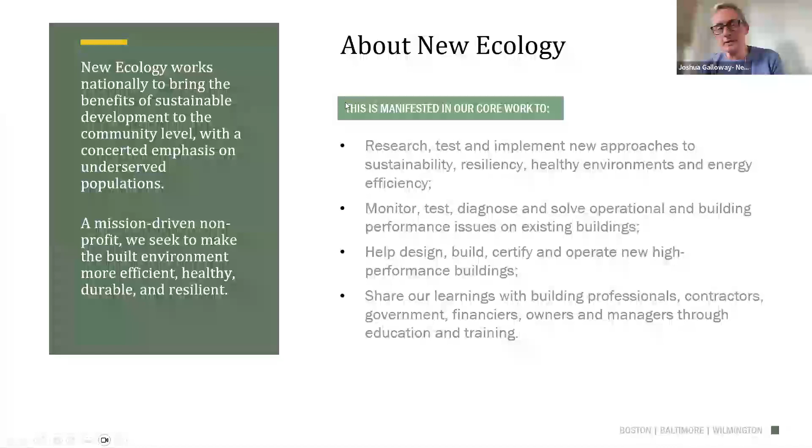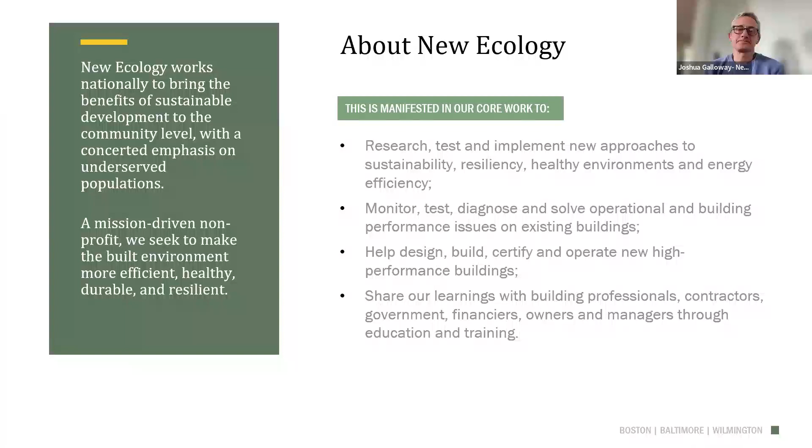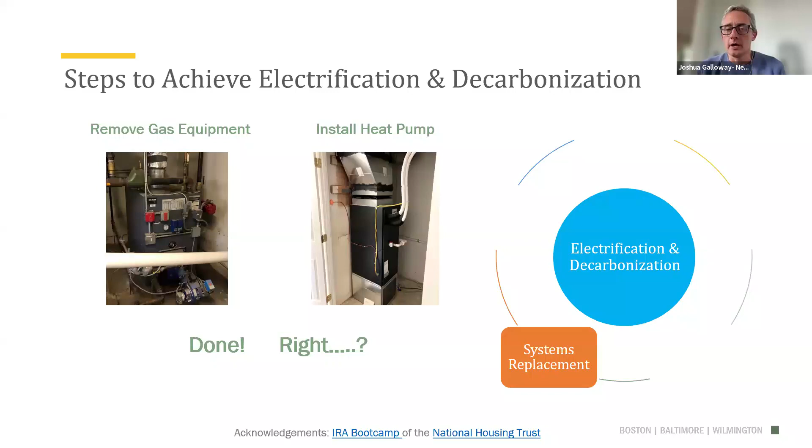So this is a simple question, right? You just take out your furnace and you install a heat pump and you're done, right? Next slide.

The answer is no. The reason is when you take out a furnace and you replace it with a heat pump, you're ignoring all of the other parts of the building and how the building works and how the residents experience that home. And so we really want to emphasize that if you're going to electrify and decarbonize, you really need to work on making the building more energy efficient and comfortable as part of the electrification process. And that's what we're going to speak briefly about today. Next, please.

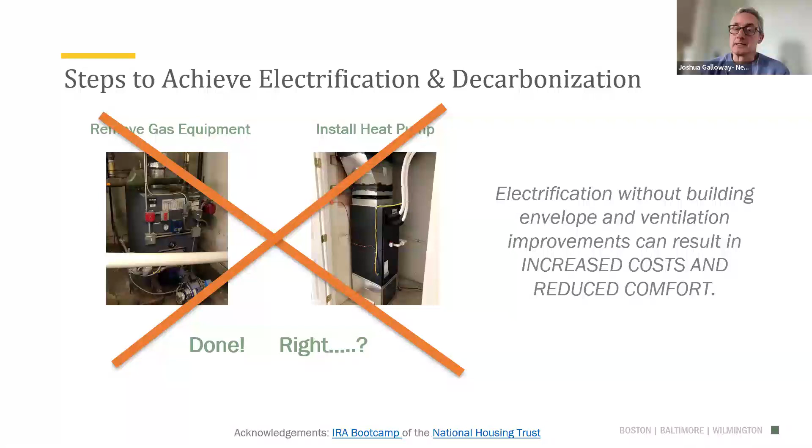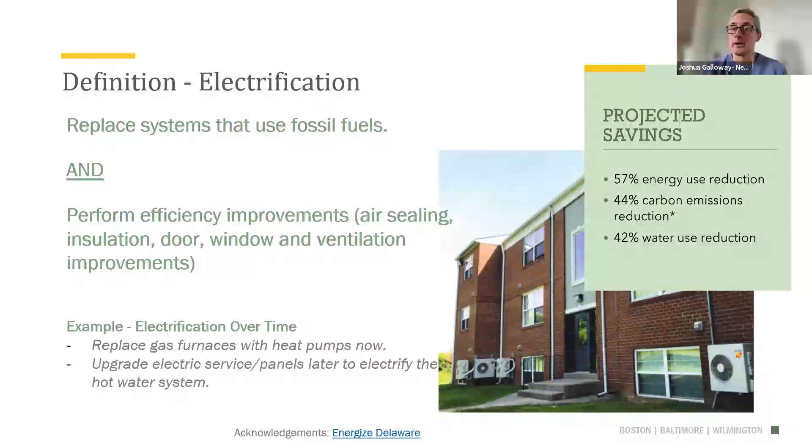We did not replace the gas water heaters as part of that process because there wasn't enough capacity within the electric panels. And so electrification is not an all or nothing experience; it's set up for the next time systems are replaced to increase electric capacity. And so every community is going to be a little different about how the approach fits in. Next, please.

We've been doing this work with the National Housing Trust, and its Inflation Reduction Act endeavors, including a boot camp that we're doing with the National Housing Trust and others. And what we've learned during this process and working with CDCs around the country is that it's important to think about all the pieces. And so number one, when you are going after an electrification or a decarbonization scope, is to reduce your load, reduce the amount of energy needed to heat and cool the buildings.

Number two, think about resident comfort. Definitely have to make sure that resident comfort and energy efficiency are parts of the puzzle. Indoor air quality is also important. That's one of the main reasons to remove combustion appliances from a building, to improve indoor air quality. Also have to think about ventilation. And then systems replacement, that's the easier piece in some ways,

followed by renewables. And so when we think about electrification and decarbonization, we're reducing energy required to run the buildings. We're taking into account resident comfort, indoor air quality, system replacement, and renewables. And each property will approach this in a slightly different way, but we have to keep these principles in mind each time we go after this effort. Next, please.

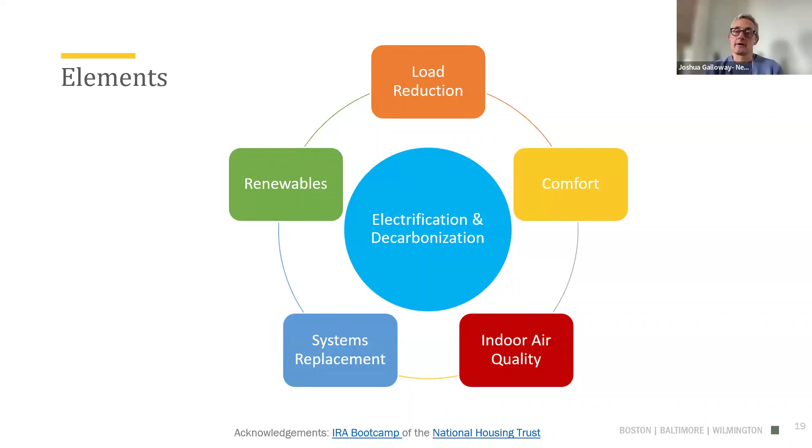Load reduction is important enough that I'm going to talk about it again. The idea is that when you make your lighting more efficient and appliances more efficient, reduce the amount of hot water that the buildings use, improve the air sealing to reduce drafts, and add insulation to improve thermal comfort, you're freeing up electrical capacity in the building and reducing utility costs. These are all common sense measures to do as part of electrification. And the great news is the Inflation Reduction Act has funds to help cover the cost for doing these measures. Next, please.

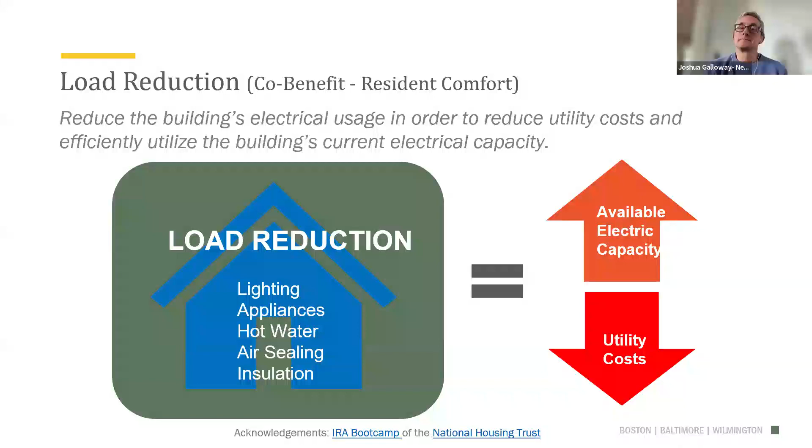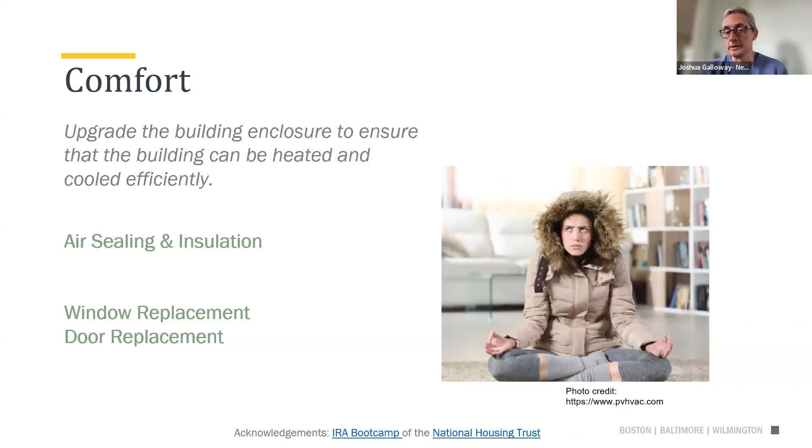And the goal here is to find the best solution for each property. So it's not a matter of one size fits all; it's a matter of working with your team, including property management and property maintenance, to define what are the best systems to replace in the buildings, knowing that they will be the ones taking care of the buildings. Next, please.

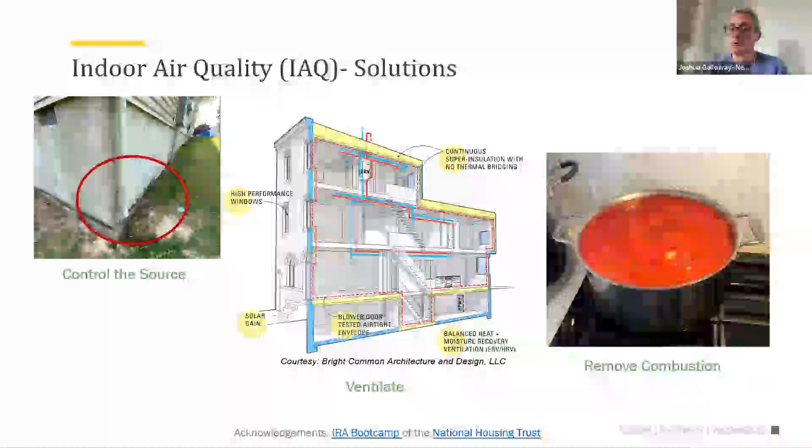And so the point with all of this is we need to think about how all of the actions that we're doing affect the end result, which is providing good indoor air quality for residents. Next.

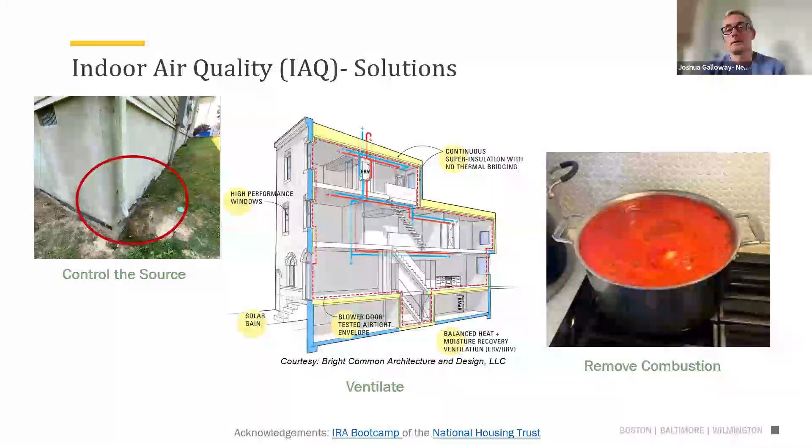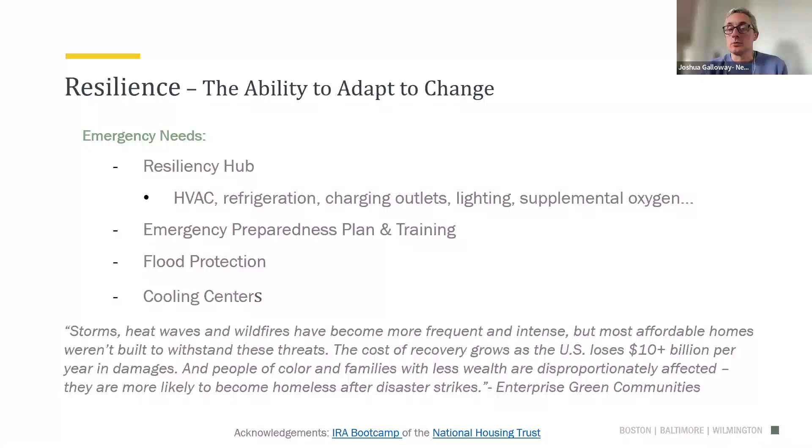Another piece in resilience is an emergency preparedness plan and training. This is not a physical thing, but something that is developed and communicated with residents and staff. And then the more obvious pieces of flood protection and cooling centers also help address the issues that we see in the Mid-Atlantic specifically, such as flooding and extreme heat.